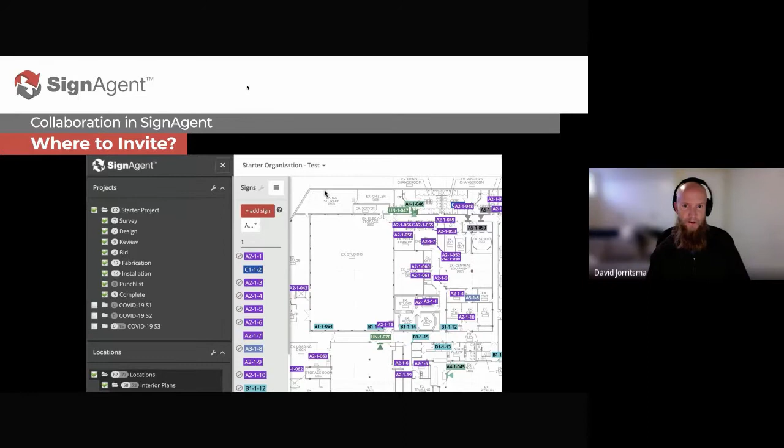We're going to go into much more detail about those, but you can add a user from there as well. So that's one option as to where you can do those. And then the next option is actually in the project—you go to the organizational part here and click edit, and that brings you to the details, where you can add a user as an admin or a viewer.

Those admins can read, write, and pretty much do everything for the project and for the organization, and they can set everything up. Viewers can only see everything that's being done, but they can't actually change anything. And there's no charge for the viewer.

As we go through, in the project here, you can add here at the project level. Again, these project members are able to create within this project. So in this case, this organization has many projects on the go. This can be used for when, say, a facility is inviting a design firm to implement a project. So you can have one design firm working on one project while you have another design firm working on, say, these COVID projects.

These people can edit and create signs within this project. These people can view within the project, and there's no charge for the viewers.

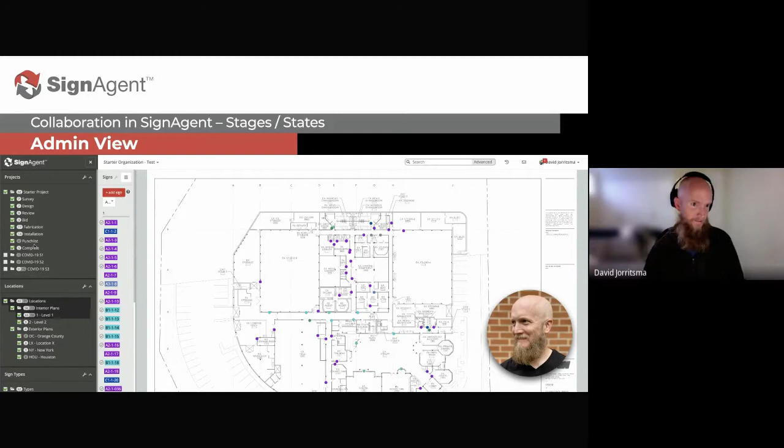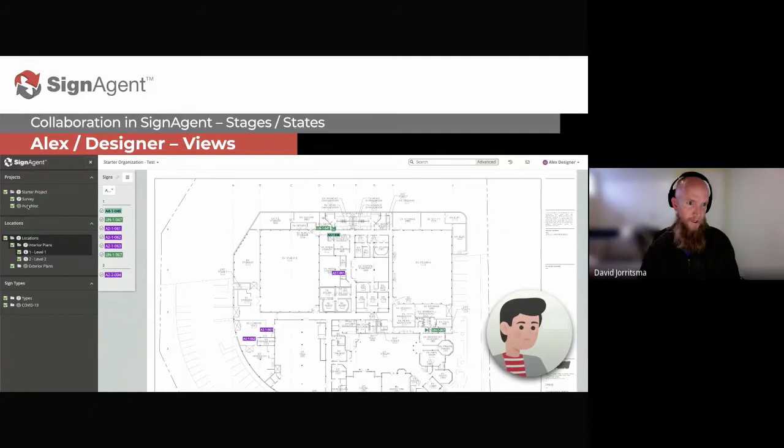Okay, and then I'm going to show you now what Alex sees when Alex logs in. So if this is Alex's first job, Alex will see one project here, and he's doing a survey, and he can see survey and punch. And then when he logs in, he can see those signs, and it minimizes the sidebar. And then when you go in here, they can also expand it. And again, you see that there's only 2 states here being shown, because those are really the only parts that he's responsible for.

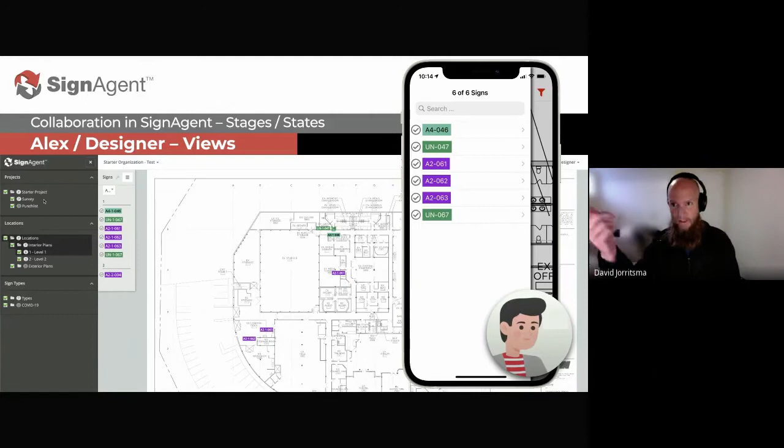And he can also take this on the go with an iPhone or an iPad. And when he logs in there and synchronizes the information, he has access at his fingertips as well. And right now, the 6 of 6 is for that level 1 plan.

And then Jenn, and this is sort of a cross section. Jenn is seeing 9 signs in her review that are ready for her review. Here's her 9 signs. She can use the filters if she wants, but it comes in as a default this way. And then she could expand that, she could also walk the floor using the iPhone or an iPad and go right up to the spot and take a photo or do any of the things that she wanted as well.

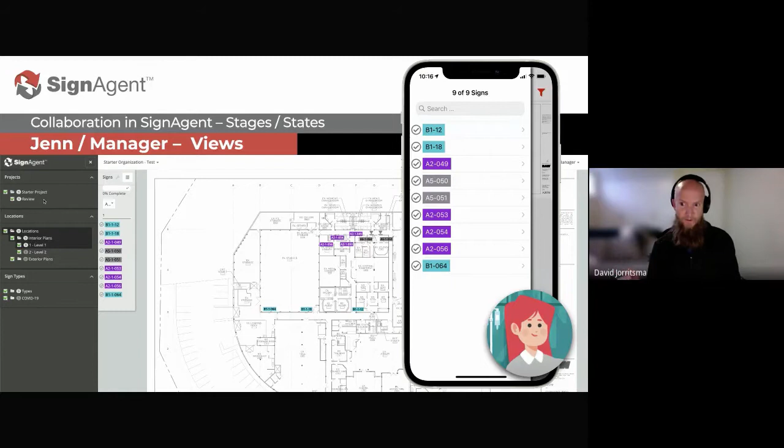But that would require the mobile license for that. And then Tom the fabricator has 17 signs in his section. In his fabrication section, he clicks on the organization, he sees his 17, you can download the artwork, you can play with the filters, but he's only seeing the signs that are ready for fabrication. He's not seeing the signs that are in draft, he's not seeing other things.

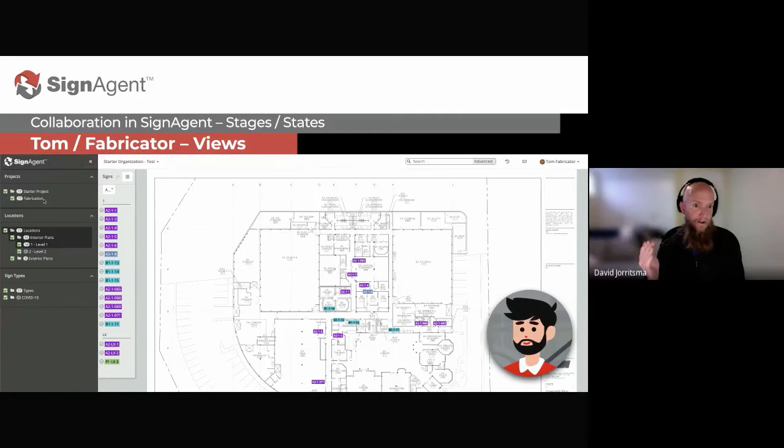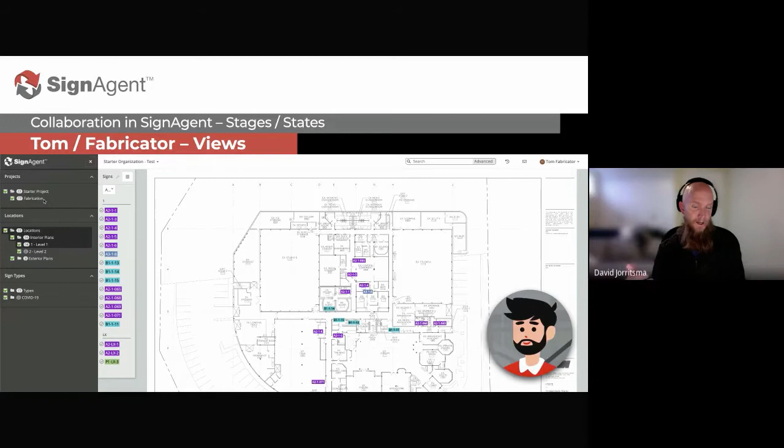And you'll see in a moment that the audit trail actually has a lot of information in there where it shows when the sign was created, that it was approved. So there's all these assurances to Tom that he knows he can comfortably make that sign and move forward.

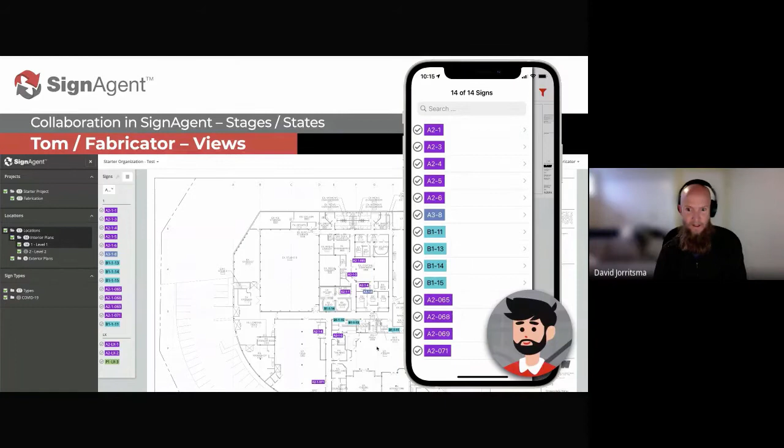And again, here's the signs, and this sidebar here scrolls up and down, so you can see where 71 ends here, 71 ends there. 11 is just sort of underneath that.

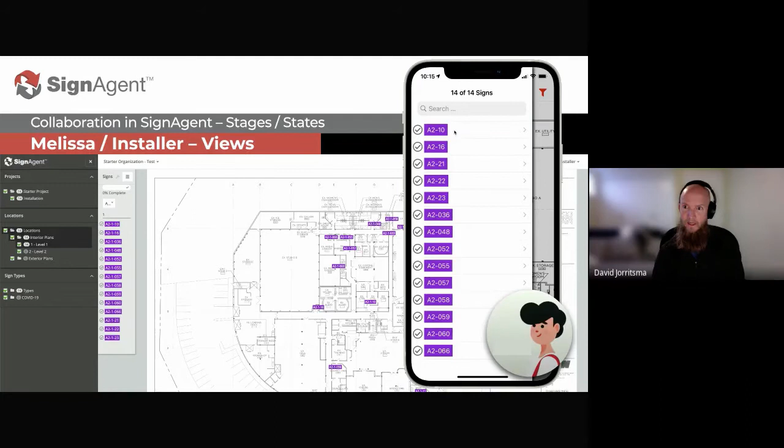And then Melissa the installer, she's got 14 signs that she's allowed to install. And when she logs in, she sees 14. She can expand it as well. And again, she has access to the signs in the mobile.

Okay, so now I'm going to talk about, we're actually going to do a day in the life of one sign. And basically it's walking through this step, one sign at a time, just to show you that you have that fine-tooth control over what you can do, what you can see, how you can set it up. And really the sky's the limit on this.

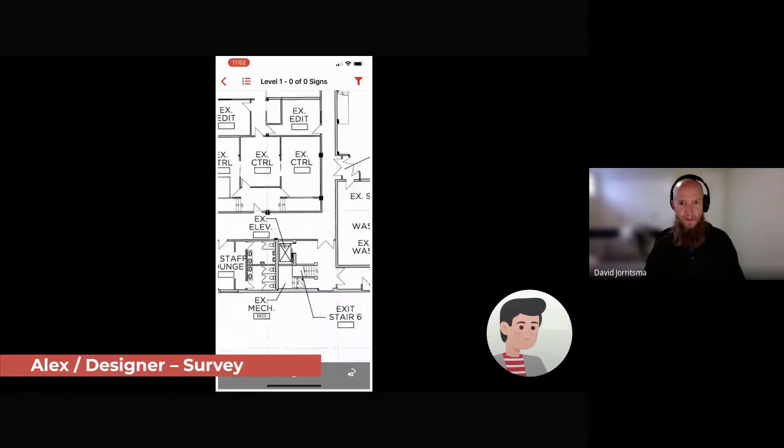So yeah, day in the life. First we're gonna have Alex going out to the medical facility and he's gonna go do his survey. So here he's on his phone, he clicks on the medical facility, zooms in, taps the screen, and his thing pops up. He sees the picture, and that's the sign where it's supposed to go.

So I didn't have signs in my house up, so I put that there, and he said okay, marks the sign in that spot, and now he's syncing the information back up. And once that information is synchronized up to the cloud...

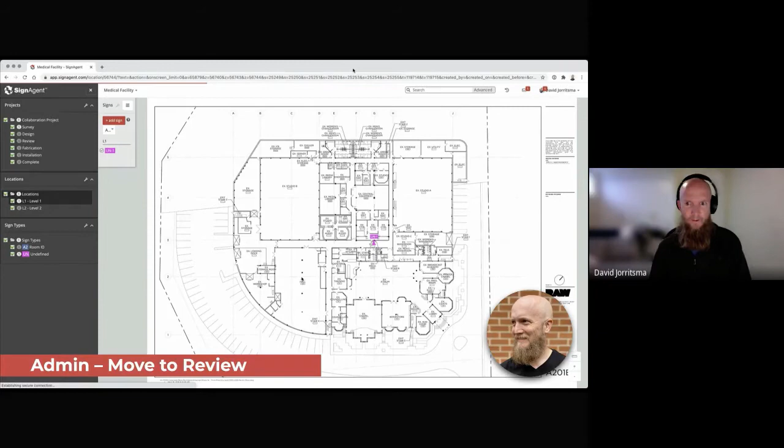Then myself, the administrator, I am marking the sign. I'm going to play this here, and when I log in, I see the one sign, and I zoom in and I see it there, and I can click on the sign, and then I can see that it's in the survey state.

So I'll pause this. I see that it's in the survey state. I can see that Alex created this sign 0 minutes ago because we're moving really fast here. And he took that photograph, so I can see all that information. And it's in survey right now.

So I would just want to move this to design, and then I'm going to make it a room ID. And then I'm going to confirm the picture. I can click on that. And then I'm going to go and just save it. So I'm doing Command S or Control S, depending.

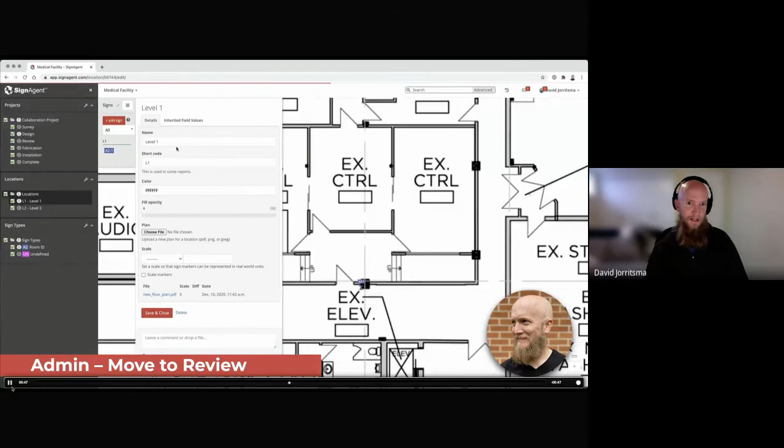And then I want to add the sign. So the form now fills out, and then I'm going to edit this. And then I can choose the inherited value for that color. And I'm picking the brown color, the shitty brown color. And now I can type in the room number.

So I'm going to use 448C. And then I can actually, because the photograph was taken, we actually do an OCR of all the text and photos. So I can now copy and paste. I don't have to retype. And then I hit save.

And now this sign is now, Alex created it, I made changes. And now I'm going to move it to review.

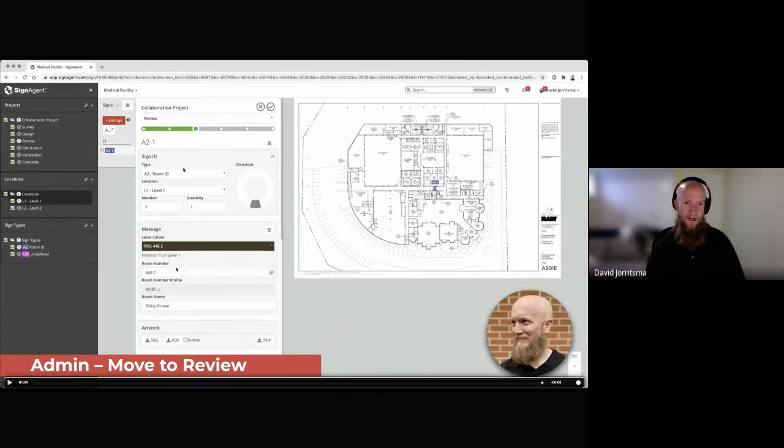Okay, and now the sign is ready for review. There's a couple of things. So this color is being inherited from the location, and it's actually auto doing the Braille for you as well. So these are all pieces that were set up, and that's in other webinars as well if you wanted to go back to some of those.

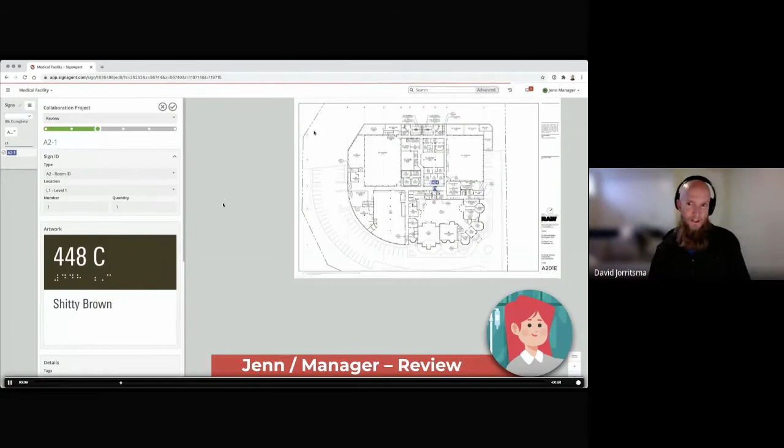So when Jenn logs in, she's actually now, because I did the one project and now I have this other project, she's seeing these two projects here. And so when she starts off here, she can see the medical facility. She clicks on review and it goes directly to that sign, and she can zoom in and she looks at it.

And says, okay, you know, that's, oh yeah, it's kind of weird. It's right in the middle of that column. So what should I do?

She's gonna actually just leave a comment basically saying, just move it to the right spot. And I'll approve this anyways.

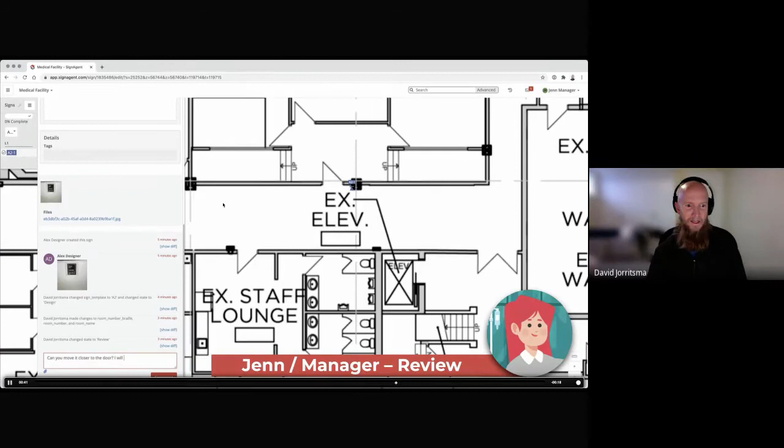And she is a slow typer apparently. So now she leaves the comment, and then she just approves it.

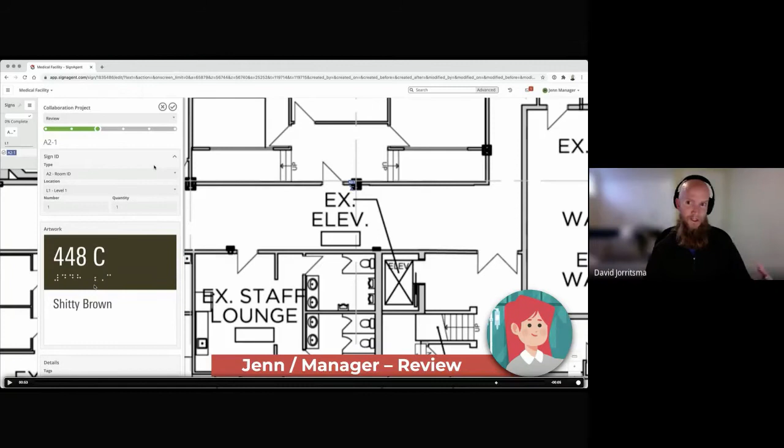Now, one thing that you'll notice here is actually that Jenn is not able to change sign types as a reviewer. She can't change sign types. And artwork is actually showing up just by itself if there's artwork. If there was no artwork, then she would be seeing the message fields that were originally there. But because there's artwork, we're saying that it's more important that she sees the artwork than the fields, because she can now get that visual representation of it.

Okay, and then yeah, she approves the sign and she's done.

Okay, so then I get a notification saying Jenn has completed her review. When I log in, I see, okay, great. Here's the review. Jenn has completed her one. And when I started, I'm gonna click on the project. It brings me to the plan.

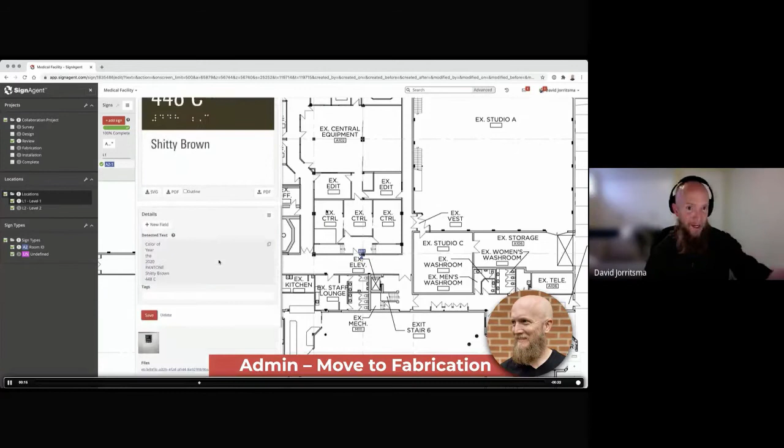I can zoom, log in, see the wonderful new sign that we have here. I can make changes to the messages and stuff like that because I'm the admin. I see her message. I actually get a notification up here as well that she made a message.

And then I can say, okay, yeah, I'm gonna move it. And then I can move it to the spot. And then I'm gonna say, okay, this is ready for fabrication now.

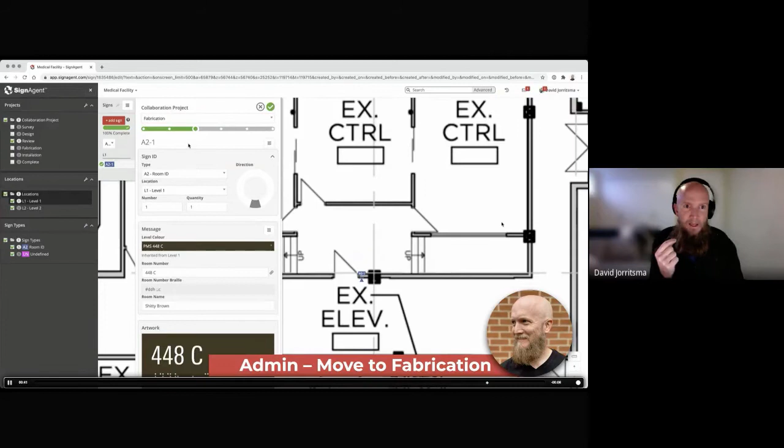Okay, and then it's Command S, Control S, or scroll down and hit save. And there we go. So that is me taking it from the review and moving it to the next stage.

So now here's when Tom logs in, he's going to see again, he was on both these projects. So he's now seeing two projects. And when he logs in, he's got the one project assigned for fabrication. He can see an expanded list view if he chooses, and so can the client.

And there's one sign right now. So he may want to say, okay, well, let me do it when there's 20 signs that are in. This is too soon for me to start creating. But again, if this was one sign and it was a pretty important sign, we may want to take care of this one right away. And again, it's seeing the forest through the trees, and to be able to focus on one sign. But you could also be moving hundreds of signs together through this process as well.

And then, so that's Tom. And then again, so now Tom has completed his fabrication. And then when I log in, I go in again, and now this sign has moved to fabrication.

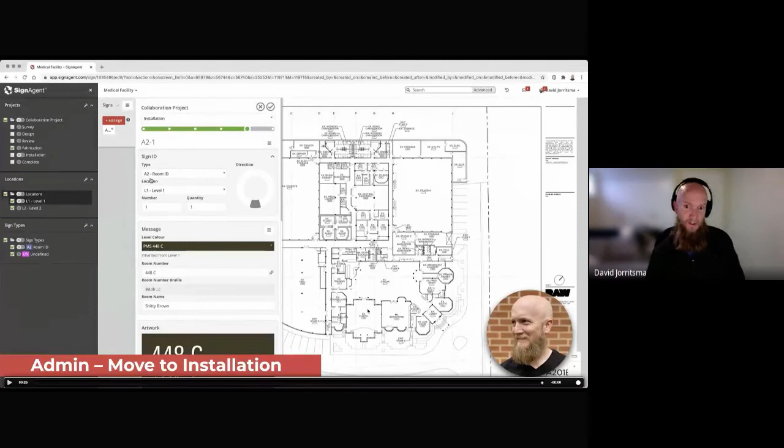So maybe you're asking, like, how come the fabricator can't just move the sign from fabrication to installation? And that'd be a great question. And really, right now, the fabricator is an assigned user, and they're responsible for just that one state. And they're actually unable to move signs from state to state.

You need to have either an administrative license for that. So there is a charge for that type of thing. And again, this fabrication process can go from one line here, but it could also be an expanded list, again, to meet the stakeholders' needs. Maybe they're cutting the material, they're applying the paint, they're doing all of these different steps. And again, all of that can be tracked and kept in those audit trails so that the client can see what's happening, the fabricator can see what's happening, or the designer sees what's happening.

So it's really very, very handy. You don't have those phone calls again of saying, oh, hey, the designer's like, oh, hey Tom, got to have this hard conversation, how are things going. It's like, it's self-evident how it's going.

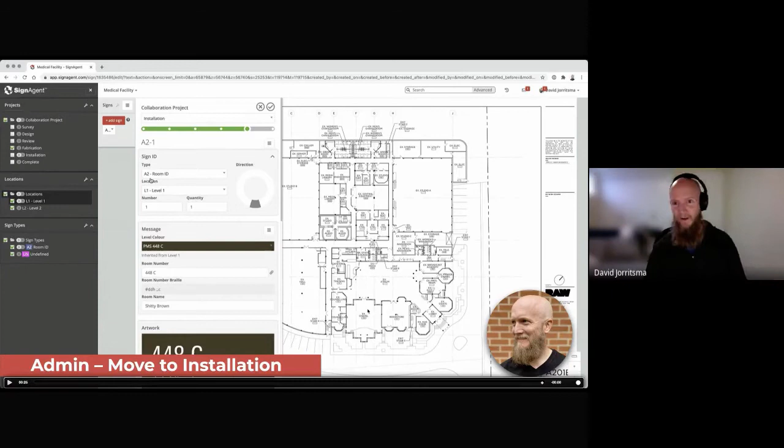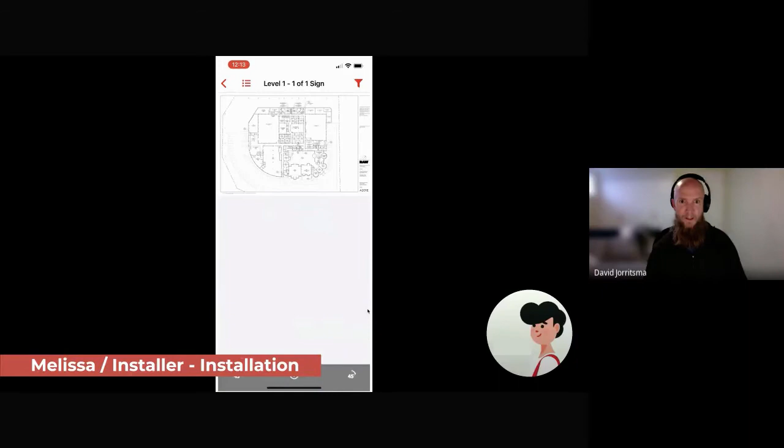Okay, so the signs are now moved to installation. So then Melissa is on her iPhone or iPad, and she comes in and she can click on the level. She can zoom in a bit, or she can click on the link there, and then she sees the artwork. She sees the sign that's in her, in the box that she's working with, and she can also see the previous sign where it is.

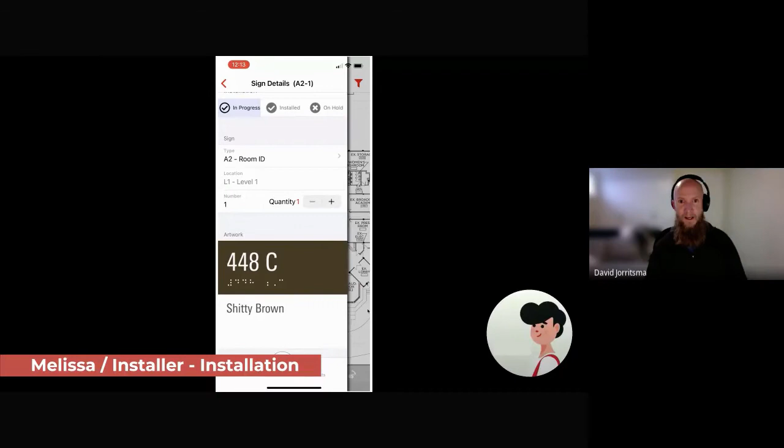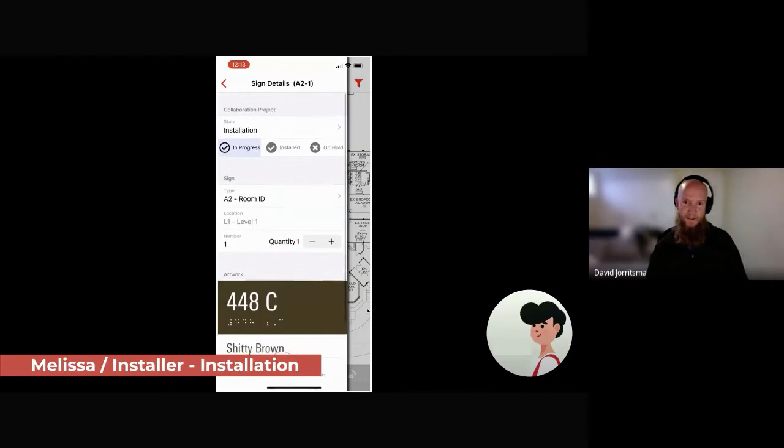And then she can install the sign. So she's installed it, and then she can take a photograph of it, and then she marks it as installed, and then synchronizes it back up. Those little up arrows indicate that there's information on the mobile device that needs to be copied up. And once you've synchronized all that information, then it goes up to the cloud.

And now the final step is actually just moving this sign to complete. And actually, I guess the one step I missed in this one here to make it similar to the previous one would have been Alex doing the punch list.

But again, maybe Jen has complete confidence in the system now that she no longer needs to spend additional money to do a punch list because the installer is actually installing the sign. I'm just saying that could be a possibility.

So admin is now moving the sign to complete. Click on installation. Select the sign.

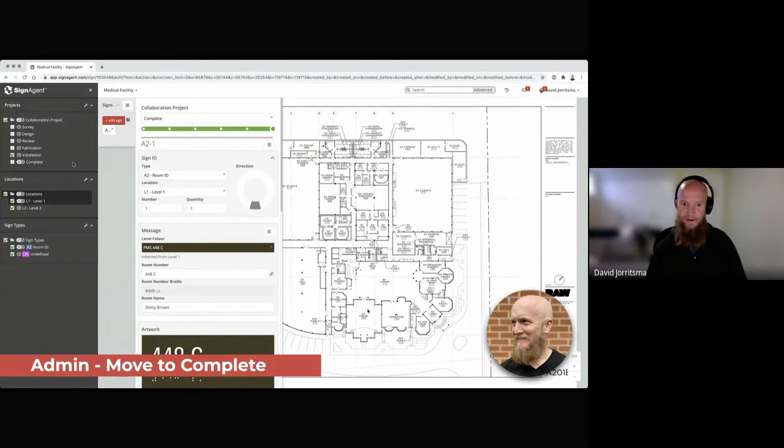And then again, yeah, you see the new photograph. You look at it, say, oh yeah, that looks level. I know that's my side monitor, it's not really a sign, but again, no signs at home. And then let it, it looks good, save it. And we are done and complete.

All right, so, and then I guess, yeah, next is any questions? And then I would be happy to go through either one of those projects in more detail, showing how to create the states themselves, those types of things.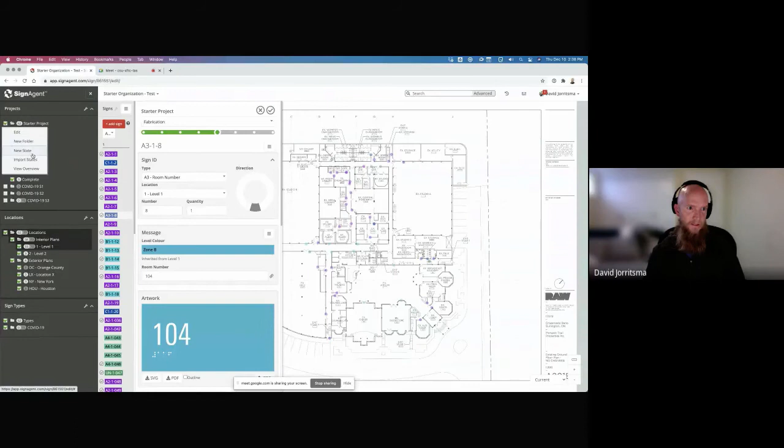Or you could go to the project and say - here, let's do that - we could just say I want a new state, and this is electrical, you know, priority.

And then you can invite the permission person in there for that. And that would be David plus, or David plus manager at SignAgent.com - that was the email that I used - and then we can just do that.

And then actually, I won't even put somebody in there for now, and we'll save that. We get a state there - there's the electrical priority. Depending on where that goes, you can move that around just by dragging and dropping it.

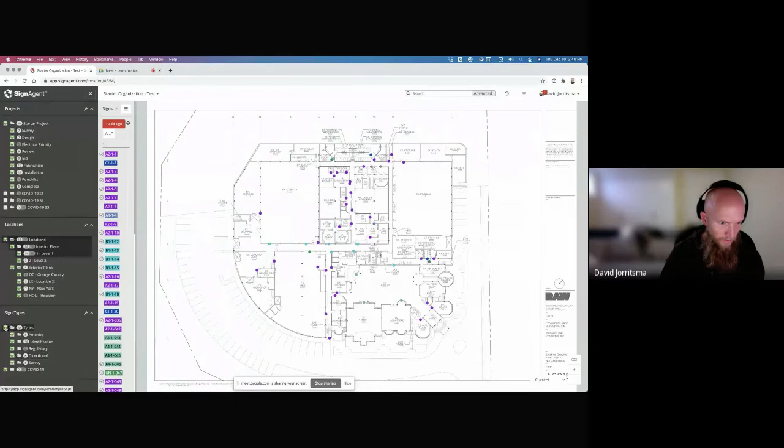And then I'll go to my location, and then we can say, okay, well, all the directional signs are electrical priority. Then I can select all of these signs and move them into electrical priority.

And then I can just export this. I go here and say export. Then you can do PDF location plans, Excel message schedule, PDF template, and the likes, and then export. And then you're going to get just those ones.

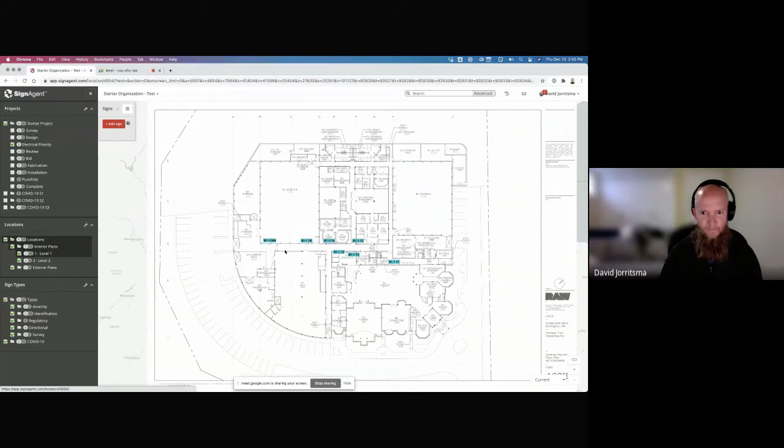One other thing you can do to add on to that, Dave, is that if you want a certain state, like the electrical state for example, to have a certain set of technical drawings or other information, you can attach a file to the entire state so that anyone invited into this organization, project, or state will be able to see and access those files. So rather than them emailing you saying 'can you send me the standards package from two weeks ago,' or even worse, accessing something out of date, you can just attach the files right to the state or location. It will attach into every sign downstream from that, and everyone will be working off the same thing at the same time.

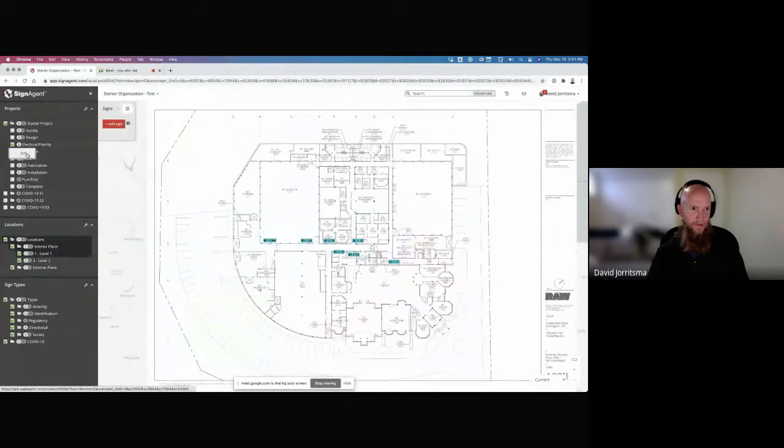So it makes sharing information really easy in here too. What Jesse's saying is if I come into this electrical priority, if there were permits or different electrical pieces included for this, I can attach them. I'm just going to look for a PDF on my hard drive here for a second. Let's just say that this README file here is that electrical priority, so we want people to read this before. So it's now in this electrical priority, and now when I go to my signs that are on this electrical priority, it has that README file associated with it.

We actually did the same thing for the location plan that it's on, so this has a separate location plan attached. Those can happen either directly at the sign level, if it's to that particular sign, or at the state, project, or even organizational level. So if there's a brand standard, you can do any number of things, attach permit pieces and all that, and that gives everybody on the project access to those files.

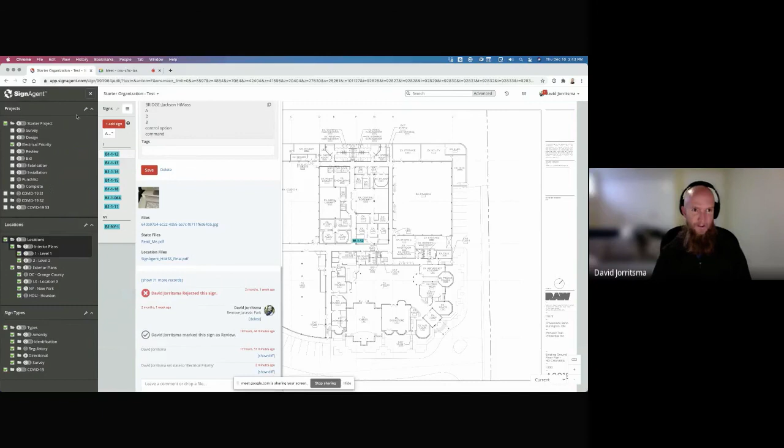Okay, yeah, notifications. I think Jesse answered it in the comments, but there are some limitations to the notifications, and that's one of the pieces we're looking to expand upon in the coming year, to make it more customizable for you guys, so that if you want people to know it's ready, then it's ready. If you don't, then you don't, giving you more control over that.

Any other questions there, Jesse? I think I got most of the other ones. People can send in any messages really quickly. Oh, there's one from Matthew that just came in.

Yeah, I believe we have some web tutorials on that, Jesse? We do. Right now there's a step-by-step tutorial that goes through pretty much what David went over today. It shows things like, this is the email you're going to get, this is how you log into SignAgent, this is how you get started. So right now it's just a step-by-step article, but we're going to be improving not just that tutorial but a number of our tutorials with videos in the coming year. Right now it's just text they'll have to read, but we're going to be adding videos to that one and some others in the future too.